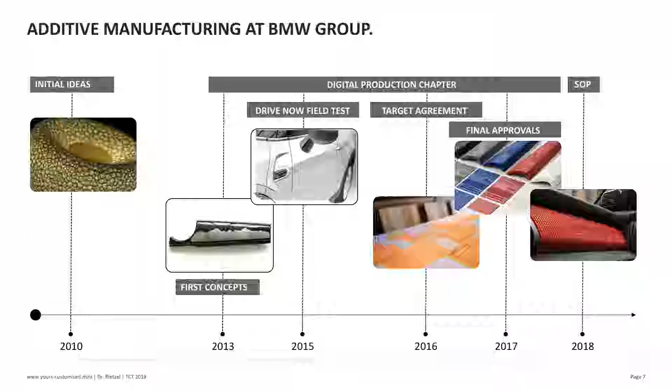In 2013, we had the first concepts for personalization. We presented it. And then we started to scout for the right technologies. In 2015, we did an investment in companies like Carbon. We were early stage customers of HP, doing a beta test program. We also had a lot of EOS machines for testing in-house. And so in 2015, we were the first company launching a field test on CLIP technology, or DLS, however you call it, for Drive Now.

That was a name-giving campaign. Everybody could provide a name. There was a vote, and we had 100 Minis driving through different regions in Germany with a nameplate on their side. And this was a good test for us. We had them in the field for a year at this time. Nobody else had parts like this even available. So you should be very fast at the beginning.

Then I remember April 2016, when we got the target agreement. There was a meeting, I had to come up, and the product line said, so you have the chance to prove that additive manufacturing can be used for the new Mini. Do you really want to do it? And I said, yeah, why not? They said, it's okay, do it, but we won't move the start of production in January 2018. If you can really provide this by that day, we do it.

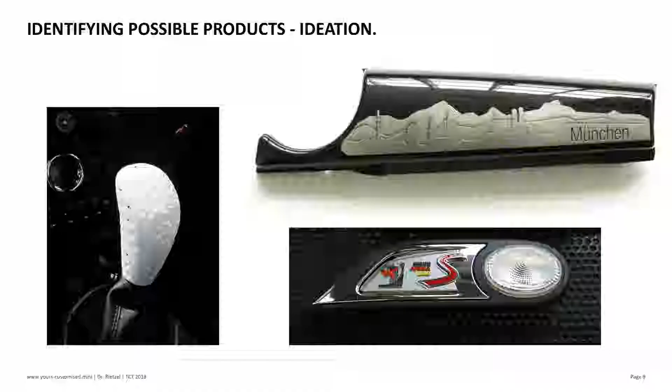We had some initial things, and those are really old concepts from 2013, but you already see the product itself, the idea of the product that could be personalized was already there. Some things came up, we got rid of other things, so some ideas were maybe not so successful, but we had to do some ideation at this point.

In the next step, you need to create all the fans in your company. So for us, this meant IT, this meant designers. We had a lot of co-creation workshops together with all the different parties in the team. Also marketing, after sales, everybody who deals with a customer has to be involved in there and has to be a fan of the product.

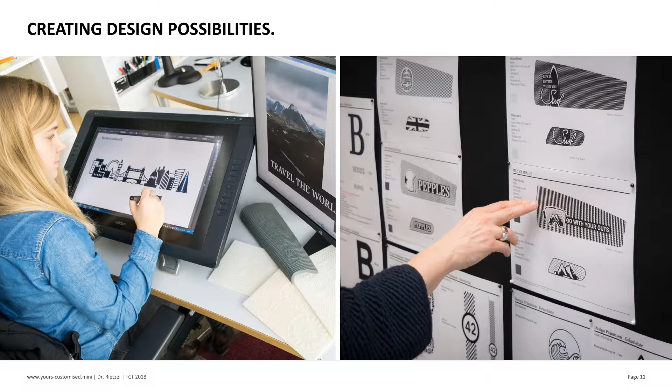So here at this time we were discussing what kind of parts do we have, what kind of patterns do we want to have, what kind of logos should we put in there. It's easy from a design perspective. They just paint something in 2D. But for me as a production guy, it's not that easy. Just one example: I need to prove that I can really manufacture all this stuff they want to have.

So minimum gap sizes, minimum features, and we focused on 3 technologies: on laser sintering, on multi-jet fusion, and on DLS. So I really had to provide this and test this for all these technologies. And here's just an example from an SLS job with different plates we produced in order to test gap sizes and features. And you can see we already had to do this in our final production setup.

The first event where we showed it to the public was Mini Takes the States in 2016. That is a nice race through the United States. There are a lot of Mini enthusiasts. We said, okay, let's have a look at them, show them the customizer, which was an early prototype, to see how the usability is, if they like it or not, if they accept it or not. And we had some side scuttles with us in different technologies.

The feedback was, can I buy them? Please, please, give me one, come on. And we said, yeah, sorry, we don't have so many with us. But we saw that day that editions are really, really important for specific events like the MTTS. So this year in 2018, we already had the first MTTS edition that was sold there. And it was really good feedback because we had a lot of fans, and they give you honest feedback because they still want to be fans in the next 5 to 10 years.

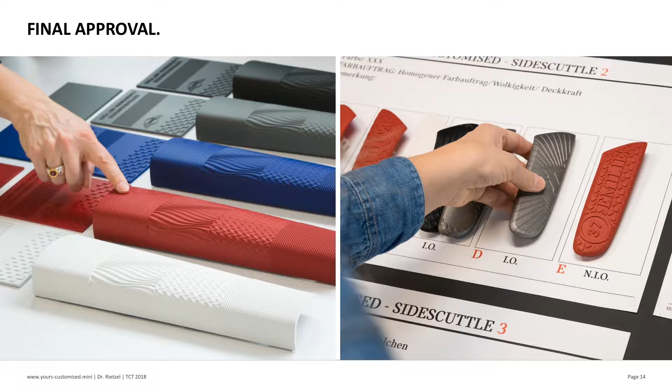With this feedback and all the knowledge we gained over time, we came back. We did the final approval, and it looks so simple, but to be honest, this is not a walk in the park. I mean, there are some decoration plates. In this case, they are laser sintered, but they are painted. That means we need to meet the automotive standards. This is a 2-layer paint we have.

We developed the paint especially for additive manufacturing, especially for this product. And it has to match all the parts within the car or on the exterior of the car. So we really had to develop colors and a painting process. And the reason why I displayed craftsmanship as one part of this project is they're all hand-painted at BMW if you order them.

Then, in the next step, you go through the final approval. That means you really discuss what is okay, what is not okay. You create a failure catalog in order to see what kind of tolerances we want to have in the next step. What kind of color difference is acceptable, what is not acceptable.

And then if you do this, you're quite far already with your project. That means the next question we had is, how do we want to interact with the customer? We have some customizer softwares online for cars, but we did not know how we could interact with a customer who does the designing. We want to guide somebody to design something, and the person should like it. So I want to guide you through our current version of the customizer.

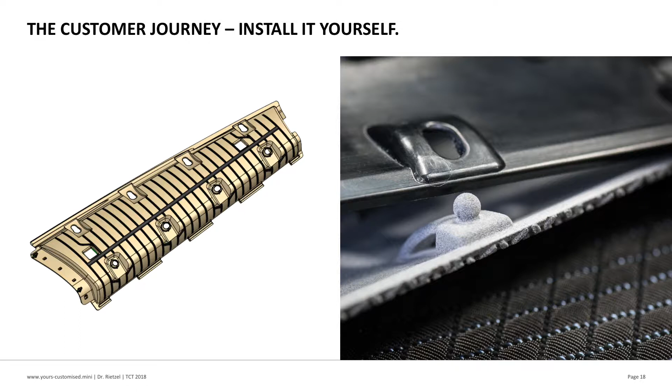And I said, all the products that are in the car have to be done easily by the customer. Everybody told me, sorry, we have special clips in the dashboard. That doesn't work at all. So we had a lot of workshops. We had a lot of internal friction, I'd say. And we found a solution. And the solution is a little sphere. Some years ago, one of my colleagues filed a patent on using spheres for assembly. And that's the perfect solution for us, for additive manufacturing, in order to keep a part in place, keep tolerances where they are, and we also performed head crash tests on this. So the sphere perfectly works.

But we had to develop our own carrier. So in this case, it's an injection-molded two-component carrier. The black component is a TPU, and the beige part, the stiff one, is a PC ABS. So we had to fully develop this. But the experience now, if you want to remove the decoration plate, is perfect. Believe me, I did it, I think, thousands of times.

Whenever I got a Mini at home, I asked my kids, hey, can you do it? And they did it the whole day. So they really liked it. They did not destroy anything, and this is important. We don't want you to do it yourself and have a scratch somewhere on your dashboard. That's not what we think is a good service. So it has to be easy for yourself.

And then the easy part, production. That's my home turf, all the other things were just hobby things around those unknown unknowns we had during the project. I thought the production part might be the hardest one, but at the end it turned out there were so many IT things and other things that were even more complicated than getting our production right.

How did we start? Well, the first idea is, if you talk to marketing, or somebody who doesn't know about additive manufacturing, and ask how this should work, they say, yeah it's easy. You have this kind of customizer, I just have it here on the phone, that's no problem, I just order the part, it goes to a printer at BMW, and you send the part. I said, yeah, that's right, but this is not that easy.

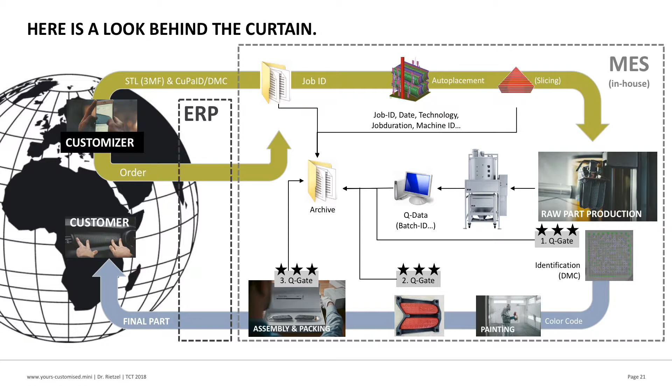We have some inspections also from a dimensional perspective. This goes all into an archive together with all the production data we have. We record the batch size, the machine we used, and all the data from the MQS or mixing systems we use. So everything is stored, and whenever we get in trouble, we can go back and have a look at it in order to gain experience again.

This was maybe one of the toughest challenges we had to create this kind of system around, because today there is no service provider who could do this for you.

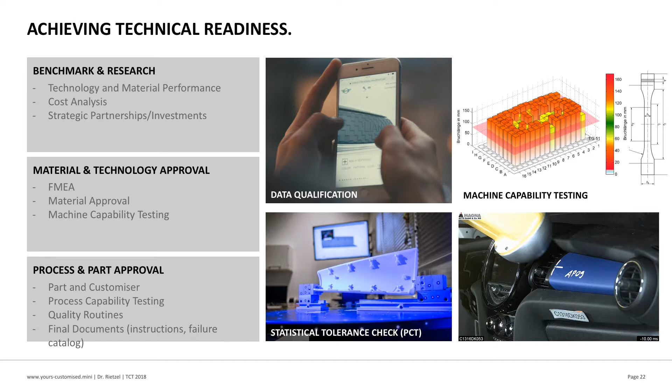Then, achieving the technical readiness. This is really important for us, so we separated this into 3 different steps. The first one is benchmark and research. We need to know what is possible, what is the state of the art, and what might be the state of the art when the product will be launched.

That means we do a lot of technology and materials performance tests at the beginning. We scout for new startups and take a look at them. If they have something, we always do a cost analysis behind it. We have a cost engineering team that calculates the final cost of those products, sometimes even before the company really knows about it. And then we decide if we want to do strategic partnerships or make an investment in this company, because this is really important.

We did a lot of investments in the last years in Carbon, in Desktop Metal, and in different things in the additive manufacturing area. This is really important, to have an early connection to those companies, tell them what we need, and see what they can do in the future and what they will develop.

Then in the next step, the material and technology approval. Here we talk about TRL 2. We start with an FMEA. We need to know what happens or what are the influencing factors on an SLS machine, multi jet fusion, or DLS machine, from an operator side, from a material side, and all the things where it is operated.

So this is also a tough challenge if you do it in parallel for different technologies and materials. On the other side, there are also positive effects if you do it with one generic approach for all the things, because then you can scale it up and do new things quite easily.

We can't do a 3D measurement of every part we sell. We couldn't, nobody would like to pay for that. But you need to set up the statistics behind it, and then do different tests within the production to find out those areas where you tolerate a part or not, depending on different factors. In our case, it's maybe the distance of spheres, and single things are measured according to a program.

Not only does the geometrical stability have to be given, the most important thing, especially for the decoration plate, is the head crash test. So if you're not wearing a safety belt and you go into an accident, the dashboard itself has some passive security activities. In this case, the decoration plate must not break.

And we have to prove this over several jobs, over several batches, and different things we had to do, along with the DOE behind it. And there are some engineers in here, and engineers always like to break something, so take a look at this video.

This is one of the tests where we use high-speed cameras and also measure a lot behind it to see what happens. So in our case, the decoration plate does not break at different points.

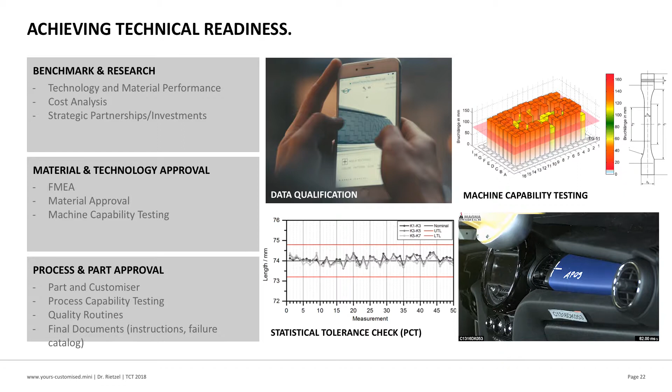We had to fully test this and provide this as our knowledge behind it. According to those things, you need to set up the quality routines, of course, because everything that might happen will happen in the production. This is one of the standards you should really consider. That means the documentation behind it, the instructions, and all those things, they really need to be safe, fail-safe. Everybody should understand it on the production line.

So we went through this, and we were able to hold the SOP in January 2018.

And what I mentioned earlier was the thing with special editions. So the first special edition we had was the one for Meghan and Harry for their marriage, mini provided a car for their charity institution they have.

I remember the day when the design team came up and said, hey, man, we need to develop something. Let's do it, let's do it. We said, no worries, let's take the customizer, and we can do it easily. It did not take weeks, it was a question of hours to do this. Maybe doing some things that were not available at that day, but we were able to do this for those editions in a quite easy and comfortable way.

And that was a really good thing for the design team to understand that we can have those specific areas in the car, we can modify them for those editions, and yeah, we are really getting into speed now with it.